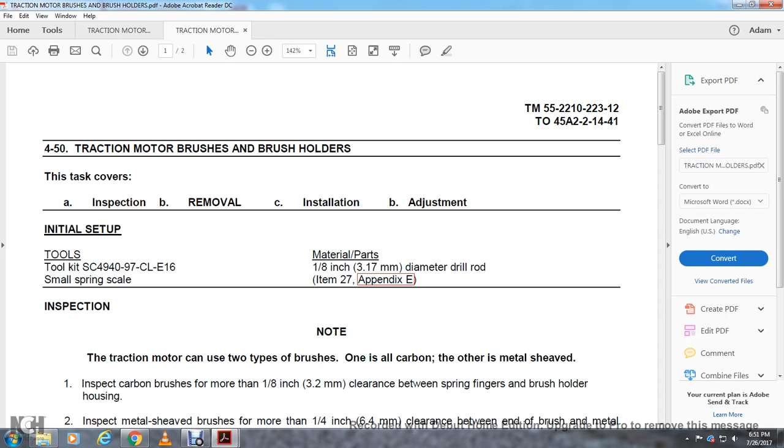One is all carbon and the other is metal sheathed. Inspection of the carbon brushes: more than 1/8 of an inch clearance between the spring fingers and the brush holder housing. Inspect the metal sheath brushes for more than 1/4 inch clearance between the end of the brush and the metal sheathing. Use the spring scale, checking the spring tension between 8 and 10 pounds.

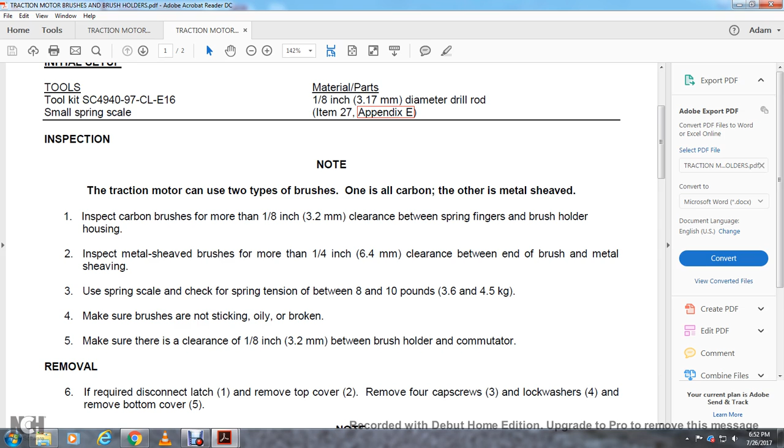Make sure the brush is not sticking, oily, or broken. Make sure that there is a clearance of 1/8 of an inch between the brush holder and commutator.

If required, disconnect the latch. Remove the top cover 2. Remove the 4 screws 3, lock washers 4, and remove the bottom cover 5.

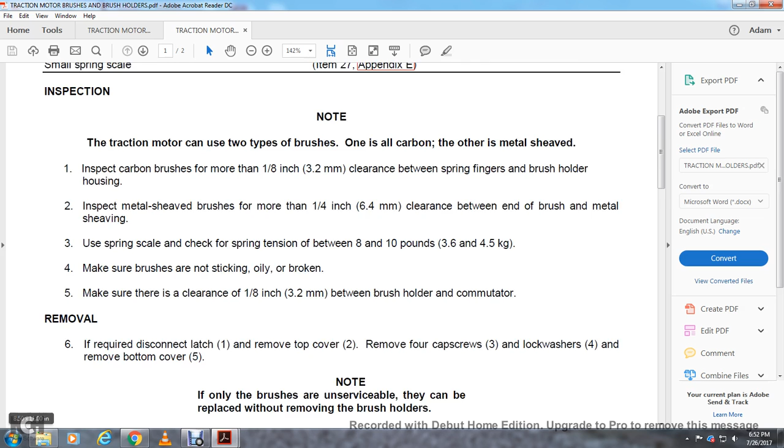Note: if only the brushes are unserviceable, they can be replaced without removing the brush holders. Remove the screw 6, lock washer 7, flat washer 8, remove the spring 9, remove the brush 10. If required, to disconnect the electrical lead from the brush holder 14, remove the bolt 11 and lock washer 12 and the clamp 13, then remove the brush holder.

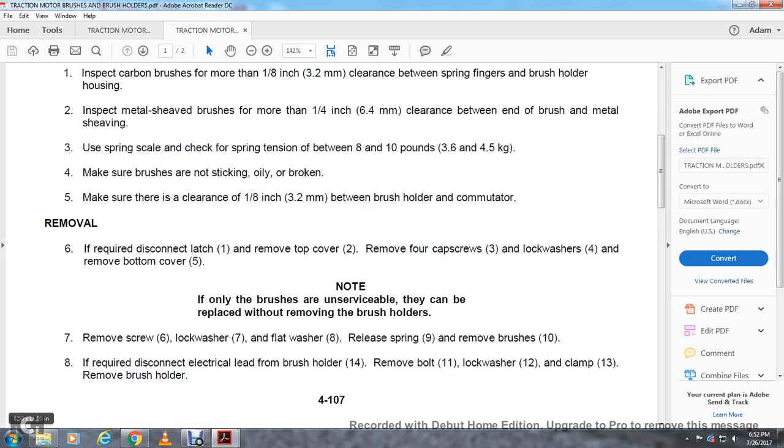The installation: Position the brush holder 14 in the traction motor. Install the clamp 13 and bolt 11 and lock washer 12, finger tighten the bolt only.

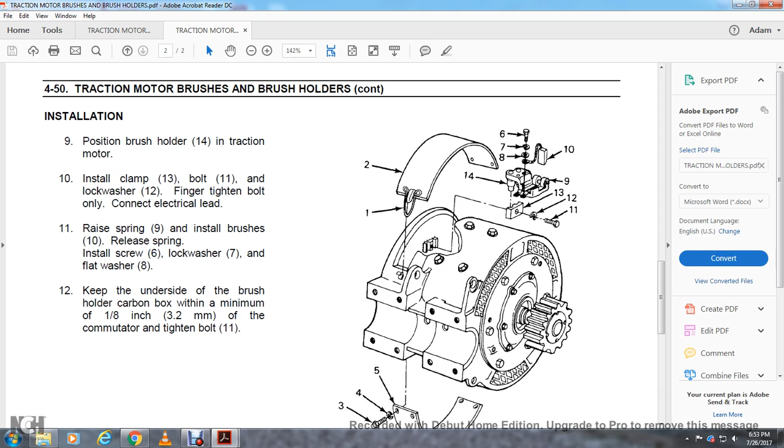Connect the electrical leads. Raise the spring 9, install the brushes 10, release the spring, then install the screw 6, lock washer 7, and flat washer 8. Keep the underside of the brush holder carbon box a minimum of 1/8 of an inch from the commutator, then tighten bolt 11.

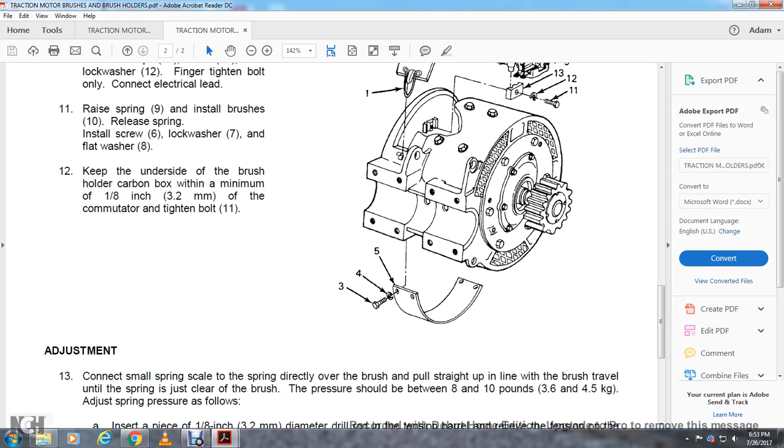Adjustment: Connect the small spring scale with the spring directly over the brush and pull straight up in line with the brush travel until the spring just clears the brush. The pressure should be between 8 and 10 pounds.

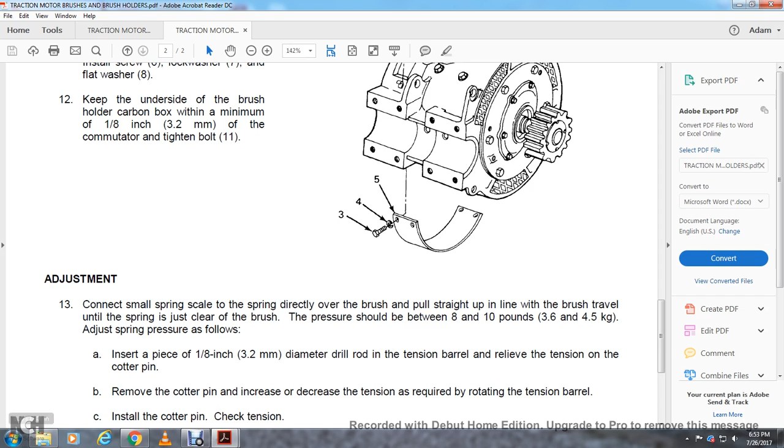Adjust the spring pressure as follows: Insert a piece of 1/8 inch diameter drill rod in the tension barrel and relieve the tension on the cotter pin. Remove the cotter pin and increase or decrease the tension as required by rotating the tension barrel.

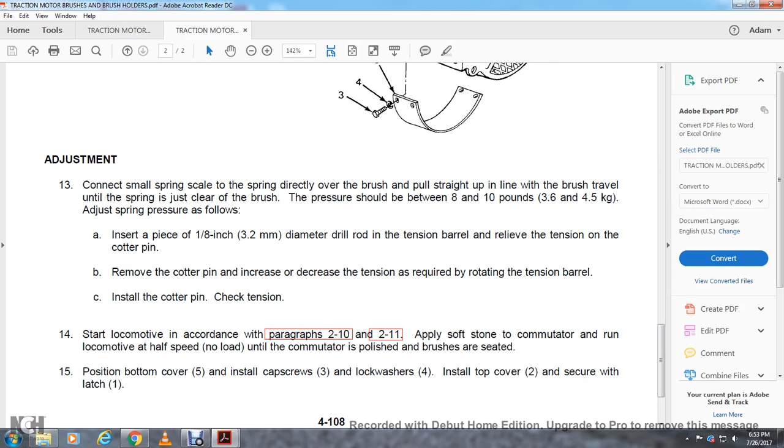Position the bottom cover, install the cap screws 3, lock washer 4, install the top cover 2, and secure with latch 1.